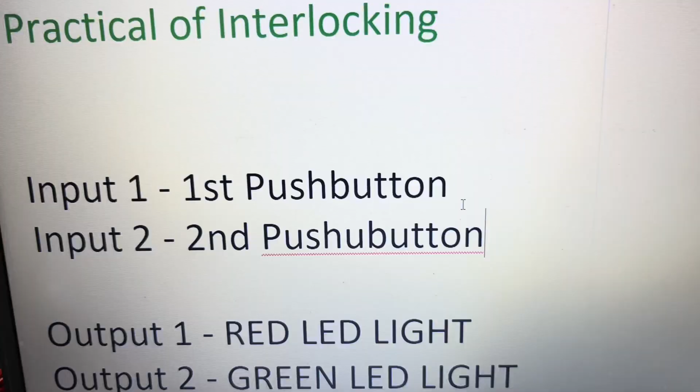So today we will understand the practical of interlocking. We have already understood what is interlocking in our previous class. So let's make a program and download it in our control panel, and I already downloaded it. So we'll see what is happening in the actual control panel.

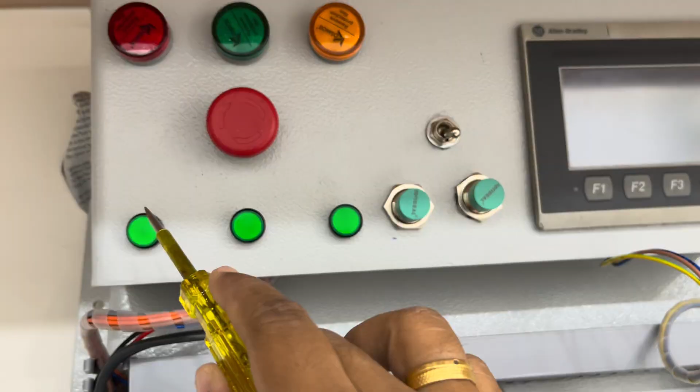So please note we have two inputs, input 1 and input 2, which is first push button and second push button. Okay, so this is my input number 1, this is my input number 2, first push button and second push button, which is connected to the input terminal of my PLC. And we have two outputs, output 1 and output 2, red LED light and green LED light. Okay, so these are my two outputs, red LED light and green LED light, which is connected to my PLC output terminals. Correct? So let me open the program here.

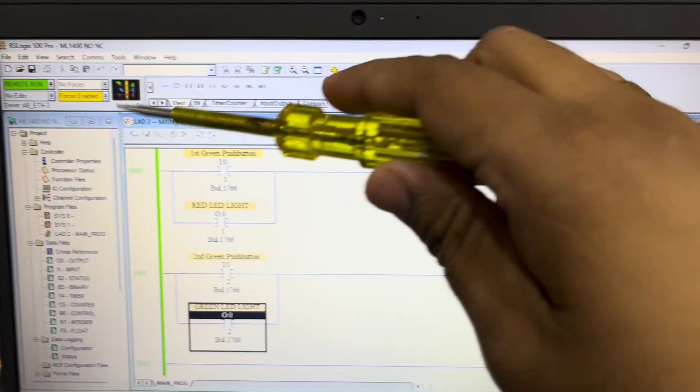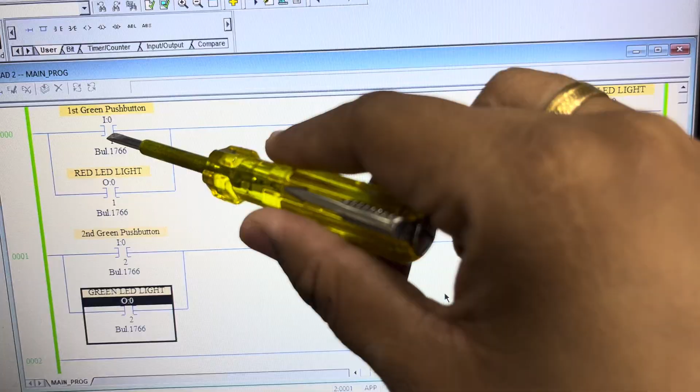Now the program is already downloaded to my PLC, and we are online with the PLC. Can you see this green light? That means you are online with the PLC. This is the half program, but just for your better understanding, I did this. We'll improve this once I explain a few points. So first thing, first push button, can you see this is the program for your first push button. So if I press input number 1, my output number 1 will be on, and if I press input number 2, my output 2 will be on, right?

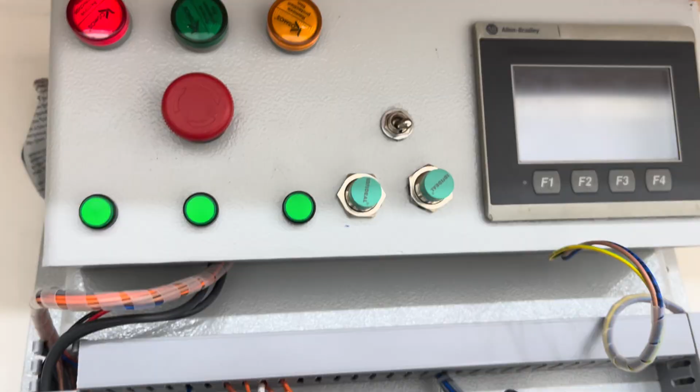So let me make a program over here. If I press this, I have not released it, my output is on. Can you see that red LED light? Okay, so this is on. Now if I remove my hand from here, because this is a push button, my output is still on. Okay, so my input, even though it is off as of now, my output is on. Why? Because this is a push button, right? The same thing is happening over here.

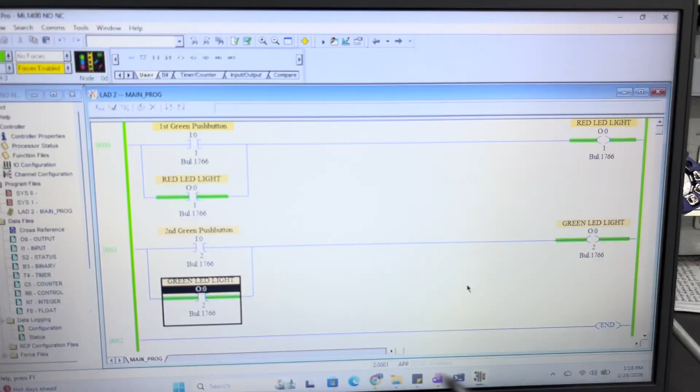We'll turn on this LED light with the help of the second push button. So let me turn on this second push button and release it. So my second LED light is on, right? Here also my second LED light is on, but this is wrong. We are working on an interlocking system. I don't want to turn on both outputs at the same time.

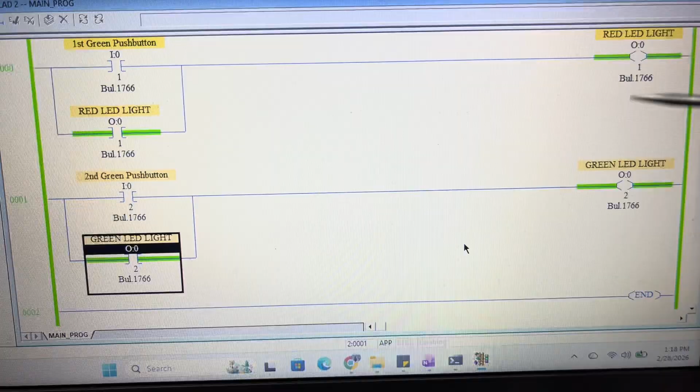Suppose you have a motor, suppose you have a compressor on your field, and you don't want to turn on both at the same time, then this program is wrong as of now. We need to use the interlocking system. If this is on, and if I try to turn this on, this must be off automatically. And exactly this should happen in the opposite way. So as of now the program is wrong, both LED lights are on. Okay, so this is the wrong program.

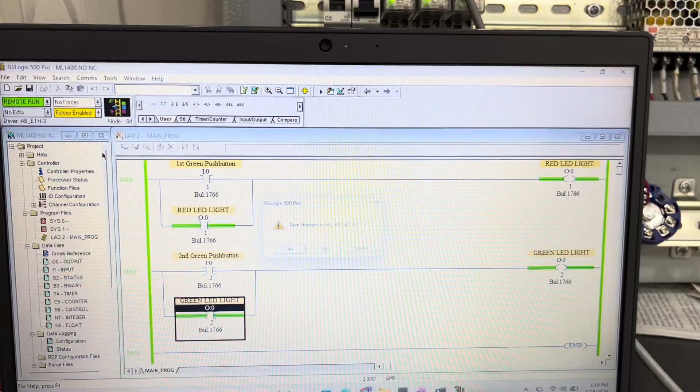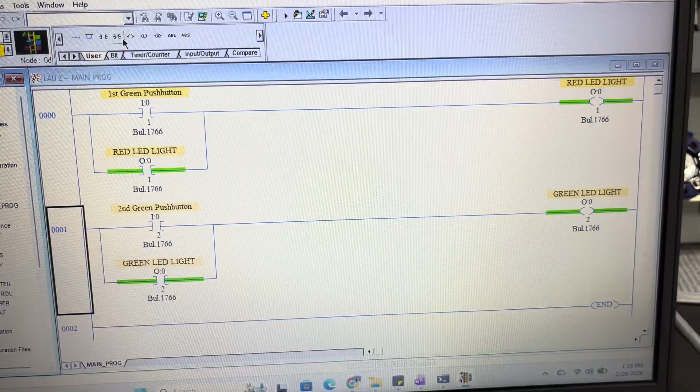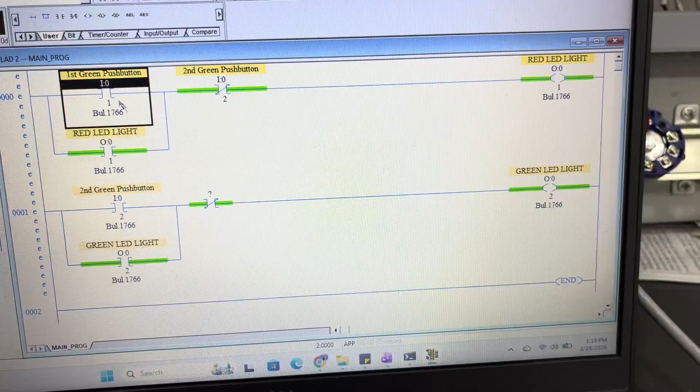So what I'll do, I'll change the program. So I'll go offline, and I'll click on OK and yes. Now I'm offline, I can change the program, right? So what I'll do, I'll take one NC over here. I'll select this and I'll take the NC over here, and I'll select this and I'll take the NC over here also. This is the normally closed, and I'll give the addressing of this over here, and the addressing of this over here, in a cross.

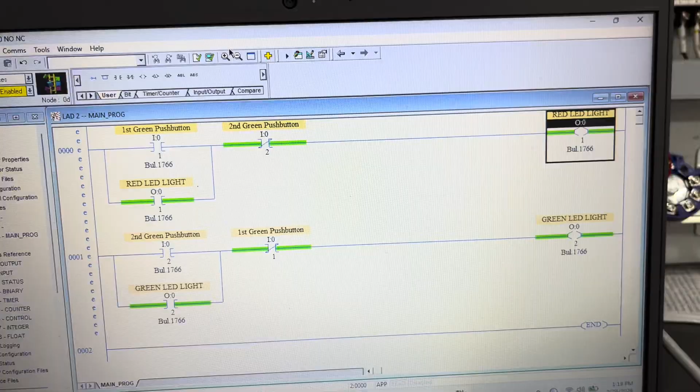So if I press this, this will become NO, so this supply will be off. And if I press this, this will become NO. Why? Because it is the same address. So if I press this, this will become NO, and this supply will be off and my red LED light will be off, right? So now let's verify the program and go to communication, system communication, and I'll download this program to my physical PLC.

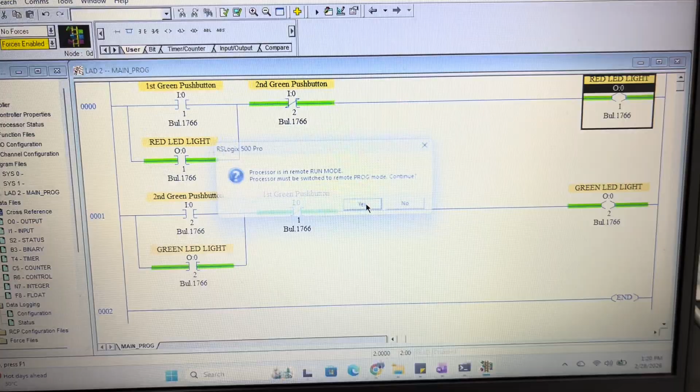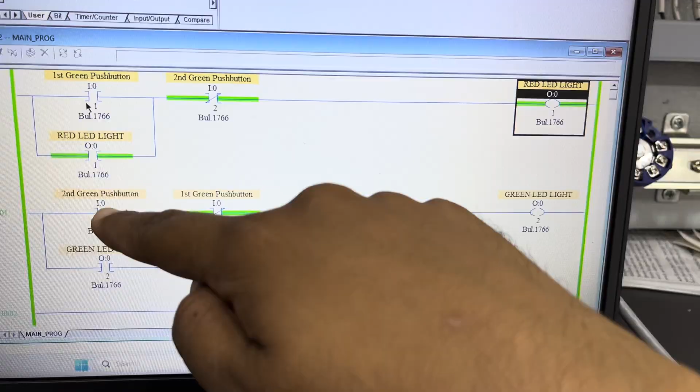Yes, yes. Change back to run mode. Yes. Do you want to go online? Yes. Right, so now I'm online with my PLC. Now let's turn on our first push button. So I'm pressing it and I'm releasing it. My first push button is on. Here also my first push button is on. Now as soon as I try to press this second push button, this must be off and this must be on.

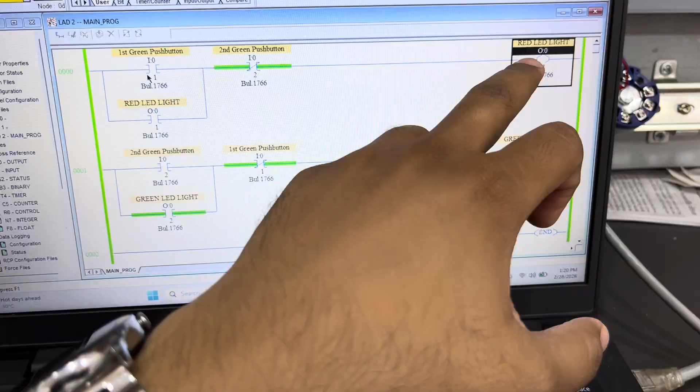See, as of now my LED light is on. If I press this, this is off and this is on. Why? Because when I press this, let me press the second once again. See, if I'm pressing this, this is becoming NO, so the supply of my red LED light is getting cut off. Okay, if I press the second push button, my red LED light will be off, right?

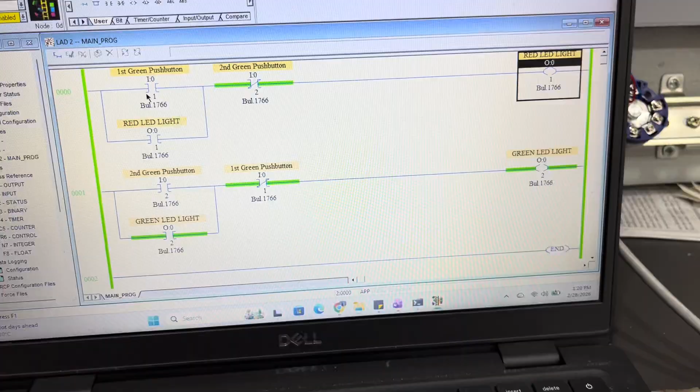So now if I want to turn on this, I press the first push button. Let me press the first push button over here. I pressed it and I released it. So if I press this, this will become NO. So this supply will be cut off. So my LED light will be off, right? So let me press again. See, can you see? Right? So this is how you can use the interlocking.

My red LED light is on. If I press this, this is off, this is on. At the same time, both should not get on. If I press this, this is off, this is on. If I press this, this is off, this is on. Right? So we have smartly used the condition of NO and NC.

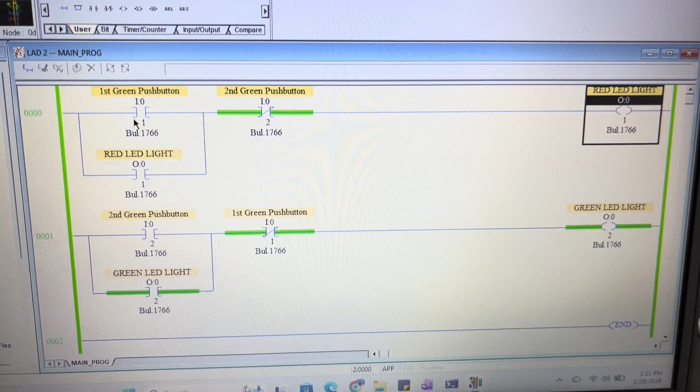That's it. This is a safety system required in an industry. Okay, this is a very important concept. We have not done anything like rocket science. We have used a simple NO NC technique and push button programming. That's it. So this is how you can understand the interlocking system, right?